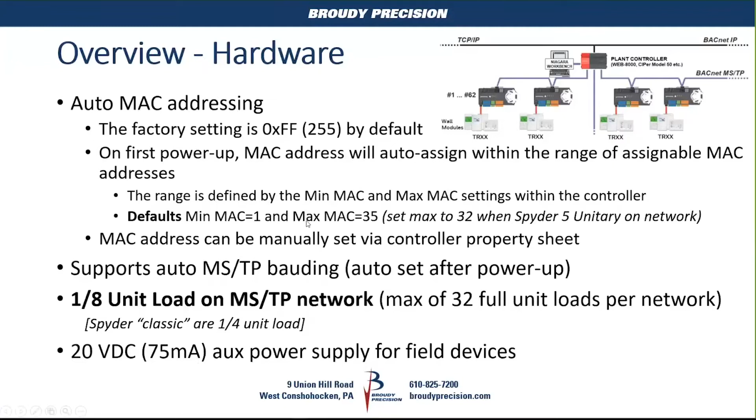Also, just like the Spyder, you have a 20 volt DC, 75 milliamp output on the controller, so you can power up field devices with that voltage. It might be a humidity sensor or something like that that you're powering up, or a velocity pressure transmitter or something.

The diagram here is showing the internal wiring of a controller. This is something that we usually don't even find on Honeywell literature. On the FAQ manuals by Guy Zebrick, he has these all laid out that way, so I thought it was worth putting that on here.

So as you can see on the solid state relay outputs, there's 3 of them, and there's an in 1 through 3. So you have to source the voltage for these. So you actually have to go back to terminal 1, your 24 volts AC, and power to this input terminal here to source the voltage for the solid state relays.

Just like the Spyders, since it's a 2-wire BACnet bus, you have to use earth ground as that reference. So you have to make sure that you earth ground the 24 volt common terminal. There is no earth ground terminal on this controller, so you have to do it either at the transformer or at each controller on terminal 2 to earth ground.

The shield terminal is just a dummy terminal. It's a convenience terminal. It doesn't go anywhere internally to the controller. You'll see your 24 volt common input is common to the grounds on your I/O. As I mentioned, you have to source the 24 volts to your solid state relays.

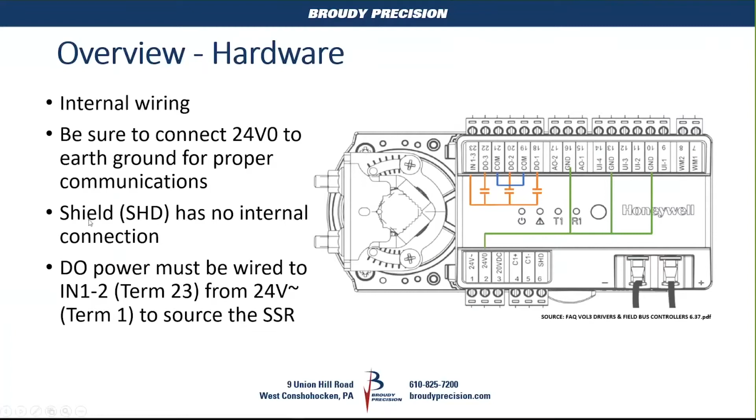And if we look at some of the software pieces to it, the controller is a BACnet Advanced Application Controller. While it's in progress, they've submitted it. I guess that takes a long time with the BACnet testing labs to approve that, but that is the intent of this controller, to be approved for advanced application.

In programming, it supports online and offline. So online, it's live, so every change you make automatically gets downloaded to that controller. So if you're working live, then it's sort of like an all the time debug mode where you see live values in your application.

Another neat feature, I think this is going to be a real helpful one, it's called application cloning. It allows you to set up a group of controllers where you can clone the application from a master controller, and then you designate target controllers, so you can do a master sync, which will then take that application and push it to the other controllers.

And obviously VAVs is a really good example of doing that, where your cooling only boxes are all going to be identical, except for your flow set points, your K factor, those type of things. So they give you the ability in there to allow syncing or not syncing of your parameters.

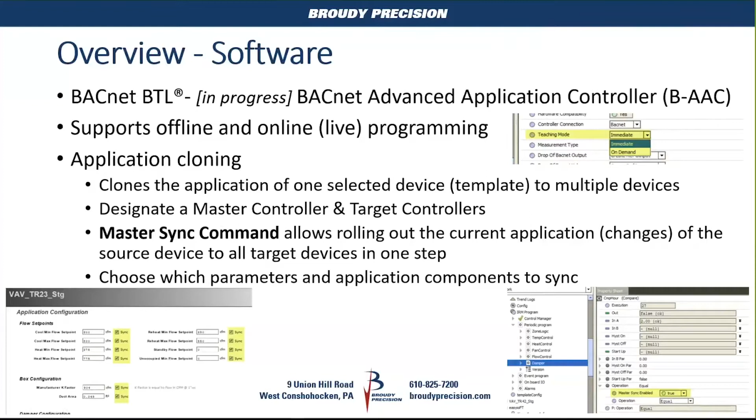Canned applications, they've got a handful written right now. John Hutchey has templates written for VAV with TR23s and VAVs with TR42s. Then he has a staged and he has an analog for your heat as your choices. So basically 4 templates are created. In those templates you have a standard graphic. This would be the status page here. This would be the set points PX here.

And then over on the right side you can see where there's an application config view, where you can go in there, very similar to the config wizard views that you had with the Spyders. You have your zone, config, temperature control, flow control, IO configurations. So you have easy to use screens to set up your application.

And then also, as we had with Spyders, you have a flow balancing view, which is set up basically the same way that we would do the Spyder VAV balancing, where you could do your K-factor balancing, or you could do your 2-point balancing. And then you have your 0 balancing as well. So we have the ability to do all of those things.

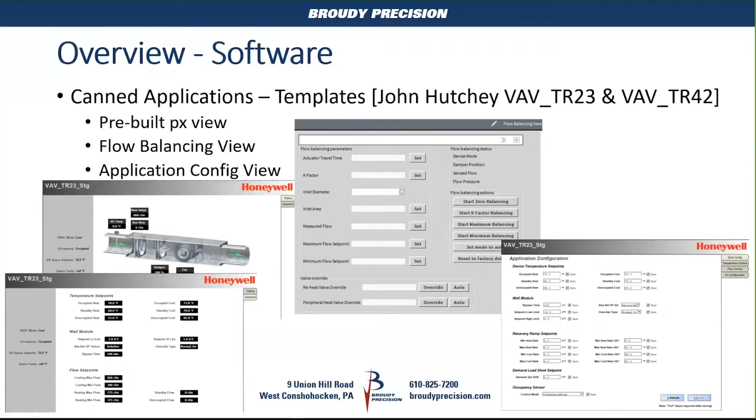As I mentioned, we have a Spyder Classic or Spyder to Spyder 5 migration utility, which again is exactly the same way that it was done with the CIPer Model 30 Spyder migration tool. It's underneath Tools. It's called Spyder To Irm Nx Migrator. When you open that up, you have the ability to choose station, library, exported library, or custom palette. So you can go through and migrate those over and use them in the Spyder Model 5 VAV controllers.

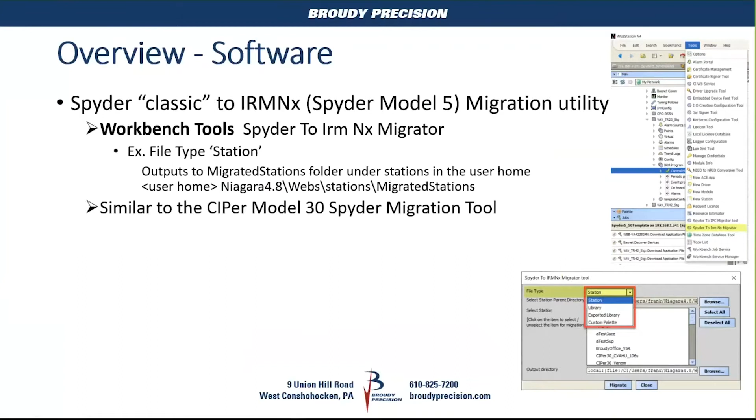A little comparison of the Spyders. What I've listed here are, the first line is the Compact VAV. Then the next 2 are the 2 models of the Spyder Model 5 unitary controllers. And then the closest Spyder Classic controller that fits what the Compact VAV fits, and that's the PVB or PVL 4022 AS. And then if you look at it, live programming, you can do in everything but the old Spyders.

Application cloning, only in the Spyder 5s. This is a big difference here. The old PVL, PVB controllers only had 372 kilobytes of memory. There's 4 meg of memory space in the new controllers. You have the integrated actuator with the Spyder Model 5 Compact VAV like you did the Spyder.

The IO mix is for the Compact VAV versus the Spyder VAV. Both had 4 universal inputs, 2 analog outputs. Only 2 triacs with the Spyder, and we have 3 solid state relays with the Spyder Model 5 Compact VAV. And the new Compact VAV is BACnet MSTP only, where you had the option of choosing a Lon Spyder or a BACnet Spyder for VAV.

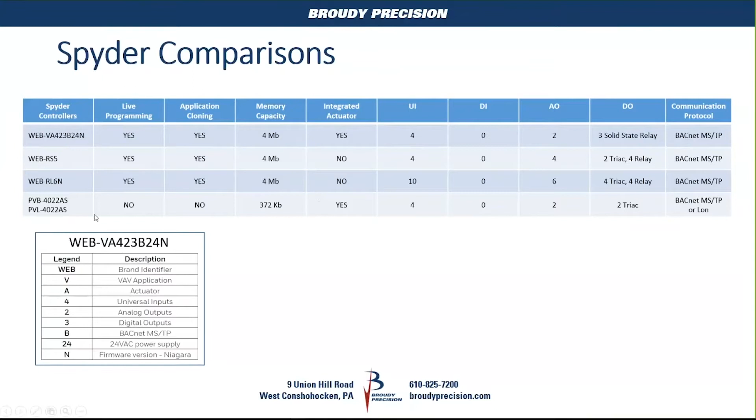If you want, I can stop here for a second and open it up for questions before we move on, rather than wait till the end. I figure with this slide, maybe there would be some questions. So if you want to unmute yourself, please do that. Now's your chance.

Okay, I either put everybody to sleep or there's no questions yet. That's fine. Either way.

And you have the diagnostics. They've added a couple more LEDs than what we had on the Spyders. Obviously, you have your power LED. There's a status LED, and then there's a BACnet transmit and a BACnet receive LED. And then based on the various possibilities of the blinking, you'll see over here that gives you a little more information than what we had with the Spyder.

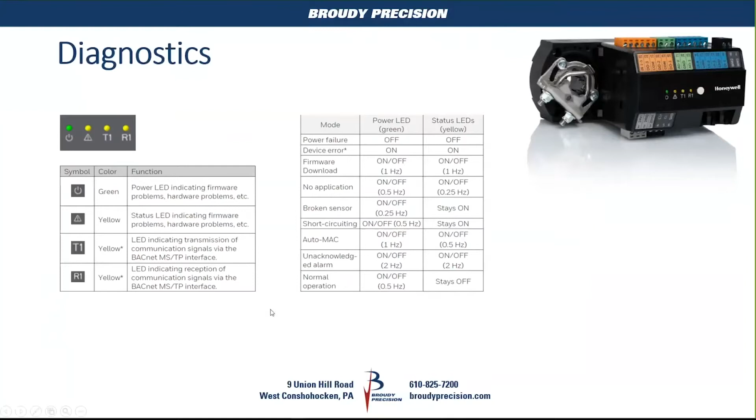And if we move, the next thing would be I'm doing a brief overview of the IRM programming components, and this was the same as what we have with the standard Spyder 5. Which, as I mentioned, was a Tech Tuesday back in October. So I just pulled a couple of these slides over just to go through that.

When you have an application expanded or a controller expanded, what you're going to find in there is the control manager. Then you'll see there's a periodic program, there's an event program, onboard I/O, and alarms. Basically, the control manager manages all the functions and displays the status of the application on the controller.

Periodic program, and this will be the folder that 99% of your applications will run. It is a deterministic control engine, so it's going to execute every 500 milliseconds, so every half a second it'll execute, guaranteed every half second. And it's going to run in a specific manner based on the order number of each of the components that are in the application. So your application would run in here.

If you have an application where you need something to run quickly right away, you could do that under the event program. It executes every 1 second, which you're wondering, okay, why would this be for fast applications? Well, under normal operation, it's every second. You set it up that if you have a binary input and you connect to a component within the event program, it'll run as soon as it sees a change on that binary input. So as soon as it sees it within a split second, it's going to be a lot less than 500 milliseconds. It'll then cause that application to run at that point, and then it'll go back to once a second.

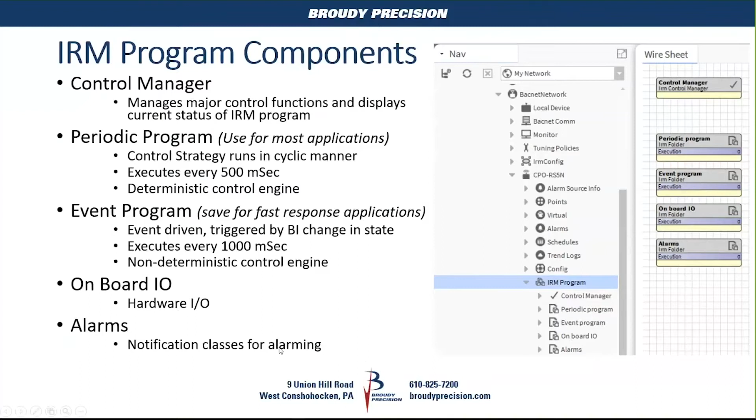As I mentioned, this is a controller that you can program live. Basically, you have two different engineering modes. You can do everything offline, and then go online to commission and download your controllers. It's done within Niagara, and then online, as you go, it'll download each change as you make it. So it's basically instantaneous downloads of every little piece. So it's constantly in sync, up to date in the controller with what you have in your database.

The application running in your station, you have what's called the project, and that's actually the controller database, and it's located in the station. And then you also have the controller. Obviously, the application lives in the controller. So you'll find where you can go in and you can clear out the project, you can clear out the controller, you can upload, or in this case here, it's teaching and learning. It's a different terminology than we're used to seeing, but teaching to controller downloads the application to the controller from the project that's in the station.

And as you're making changes, you'll see little yellow triangles with the exclamation point. That signifies that, hey, a change has been made, but it hasn't been pushed to or taught to or downloaded to the controller. So that signifies when you need to do a download.

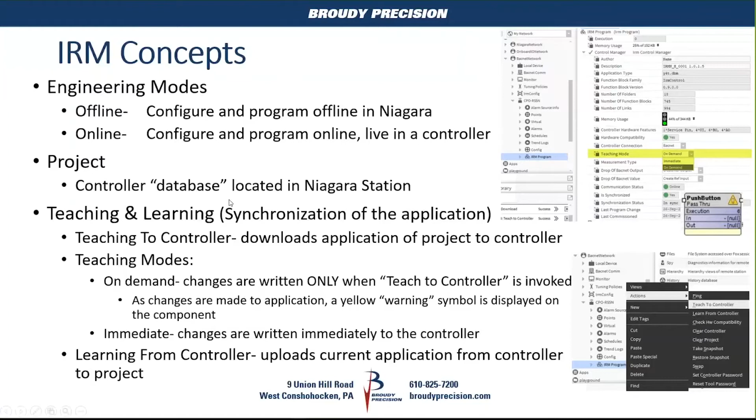As I mentioned, a few other things here. You have clear controller, so it deletes the application from the controller. Maybe something you want to do before you download a new application to it, just tell it clear controller, wipes it out. Then you can do a teach, and it'll take the application from your project in the station into that controller. Clear project would be where you want to clear the application space in your station for that particular controller. There's a check hardware compatibility, and it verifies that the configuration you have defined for that controller will work within that physical controller.

And they have another piece in here called snapshots, where the current status of an application can be backed up and restored later. Take snapshot really means backing up the application. Restore snapshot means restoring an application to the project. So if you want to back up the application that you can reuse in different stations, you can take that and then restore it back.

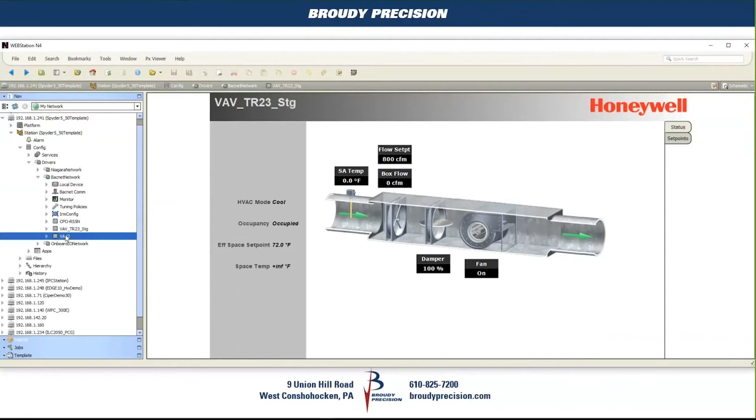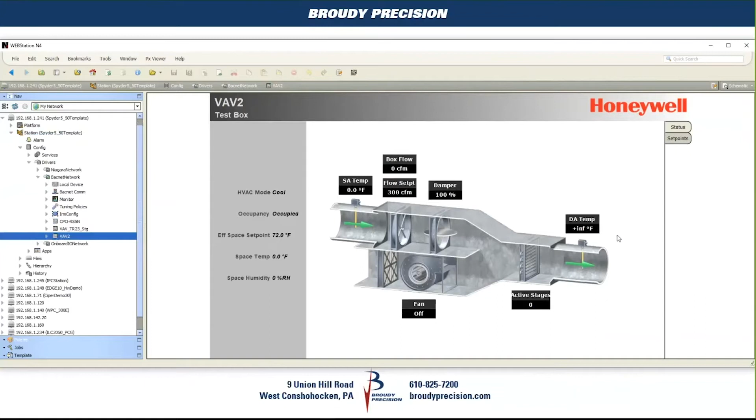Right now, I'm running this on a CIPer 50 controller, which is where the station resides. In there I've got a Spyder Model 5, the unitary one, and 2 VAV controllers as well. If you click on the controller directly, it automatically brings up the PX standard view for its graphics. You have its status page and your set points page.

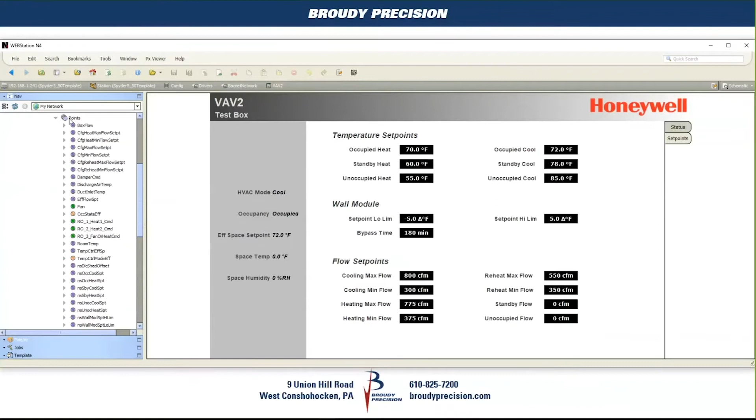If we expand that, you have your points folder, and again, these are all the BACnet points you're bringing in from your application. And you have your IRM program, and the control manager I mentioned is where the status is for your controller. It tells you the IO counts, the teaching mode I mentioned with on-demand and immediate, and the drop of BACnet output value.

The one area I haven't had a chance to play with is the peer-to-peer functionality. From what I've read, it doesn't do standard peer-to-peer; it does a reference in, reference out type of thing. So I can't explain or show that today, but we'll be doing subsequent training videos as this moves along.

Communication status tells you if it's online or not. Is it synchronized, meaning, does the application in the controller match the application in the project in your station? What the baud rate is. For whatever reason I had my baud rate set at 19.2, but 38.4 is the typical default baud rate you'd want to use. What's the deal with Modbus?

Remember, this is used for the unitary and the VAV controllers. The Spyder Model 5 unitary controller has a second RS-485 port for Modbus, where you could bring in a VFD or maybe do some I/O if you wanted to. The unitary controller gives you the ability to bring in Modbus devices, but the VAV controller doesn't have that. I don't think it's necessary for the VAV.

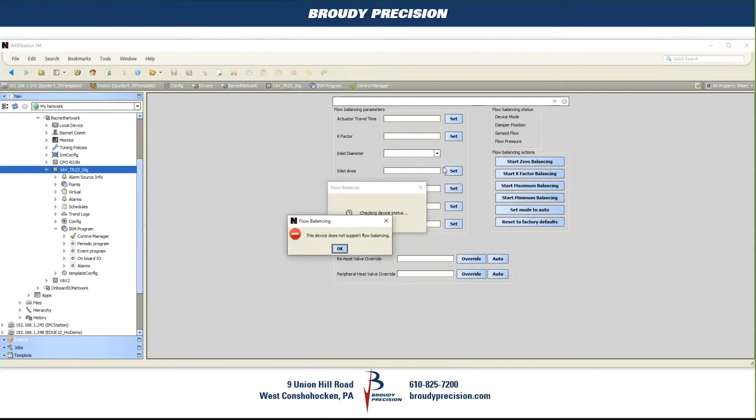But as you can see here, if I do go there, it still doesn't let me do it. So I have a bug reported for this. So I figure I'm going to show it because, like I said, they haven't released it yet. So I don't know if this is part of why they haven't released it yet or not. But as you can see, to get to your balancing, it's on the controller itself, and you have the full balancing feature available when it works. And that at this point is not working. So we'll leave that go for now.

On the control manager, as I said, you got all your statuses. You're going to set up if you're going to do immediate teaching or you're going to do on demand. And the only reason I could think of doing on demand would be if you're trying to change an application and it's a critical control and you don't want to disrupt control with intermediate downloads. So you want to completely change your application or do whatever it is offline and then force it at one time. That's the only reason I can think of to do it on demand, but you get to choose which one you want to do.

Frank, when these controllers are being downloaded, do you have a cycle of the outputs? I mean, what is the behavior of the controller? It's whatever the application would. It depends on what you're making a change to. You're not downloading the whole controller. You're only downloading a single piece of it. I see. So if you broke a link to something and there's a chance that it's going to go from true to false or something like that, then yeah, it potentially could do that. I see. Thank you. But it's a VAV application, and yeah, I guess if you have stage reheat, it could be an issue. But I don't expect that you're going to find that to happen.

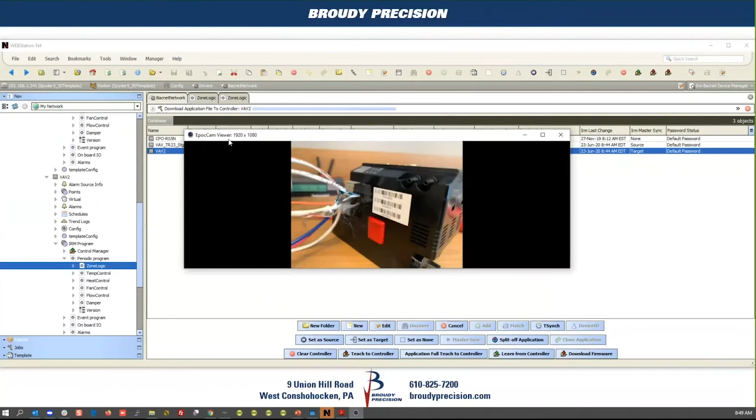On the side of the controller itself is the serial number there. Yeah, you can see what the controller looks like there on my very neat and very nicely wired test bench.

Are these available to purchase right now, or are these still? Well, based on that email that came out from Honeywell last week, they sure make it seem like they're available for purchase. Just the software is not available, so it's kind of tough to work with. I guess the thing would be if you have a project that you want to use these on, you don't need the programming right away. Now I don't know if I've seen those announcements before, but never actually have them available to ship yet.

But it's something we need to find out so that we can look to start stocking them, because obviously we want to be able to stock them, and especially knowing that it's firmware that's downloaded through Niagara, we're not too worried about if they come out with new releases, because the hardware is solid. The hardware there's no issues with. So having stock of them shouldn't be a problem. It's just getting the latest firmware when it releases, and obviously we'll make sure we have that available to everybody through our BP Tech Center.

How's that going to be deployed? Sorry? Well, I know it's through the JACE. I'm saying, like, if you're running version whatever, is that just basically a new updated IRM module that you have to copy in? Or I'm just not sure how the firmware gets into Niagara. Like, what are you copying and pasting?

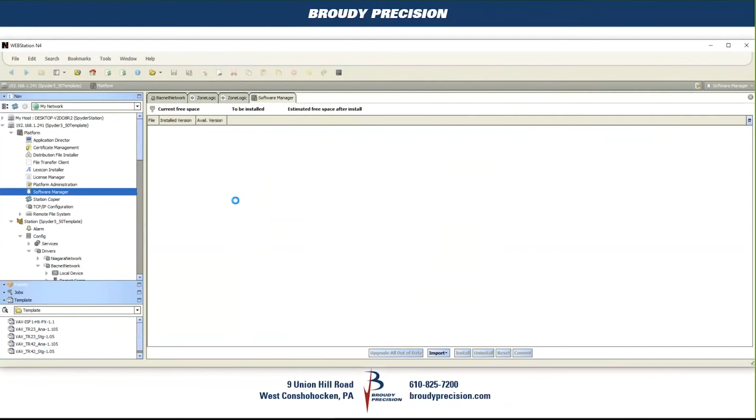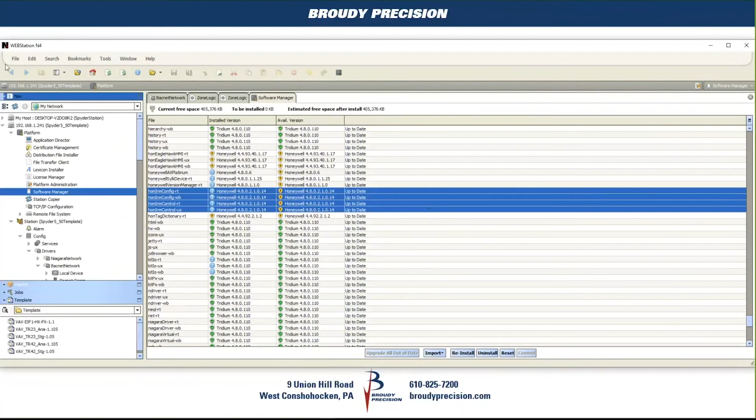But if we just quickly go in and see what we have here, it's going to be primarily in this grouping here. I thought it'd be Honeywell IRM. There you are. IRM. Oh, I'm still in the wrong section. Down here. Yeah, the IRM modules here. Plus, there's a couple of modules that are used, I believe. I thought it was a Spyder module I saw get updated as well. But basically, part of the release is going to be the modules you're going to need, the templates plus the firmware. Okay.

So again, now we're all linked up, and actually I noticed something here that I want to mention. You'll notice here something different that you wouldn't have seen in a Spyder. Normally you have your network set point, this module here. You'll notice that there's a save permanent module. That's something new. The way this control engine works, it requires this in order to be able to write back to this wall module, to this set point. It's an extra component that's used in the application. So if you were to migrate one of your Spyder applications, you're going to see a lot of these added as well. It's just an extra piece that you got to be aware of.

And I mentioned the way you could have it break out of the sync. And if we look here, there's your master sync enable. So if I wanted this network set point to be unique for this controller and not be part of my sync group, I would come in here and make it false.

So now I made this change. We come back here. Let's see if I can get it to redeem myself. It still didn't show up that way. Let's go back here. It's still showing like that. So let's see, at least if I can make this work. See, now that it's not general released, I can still say, well, it's in beta.

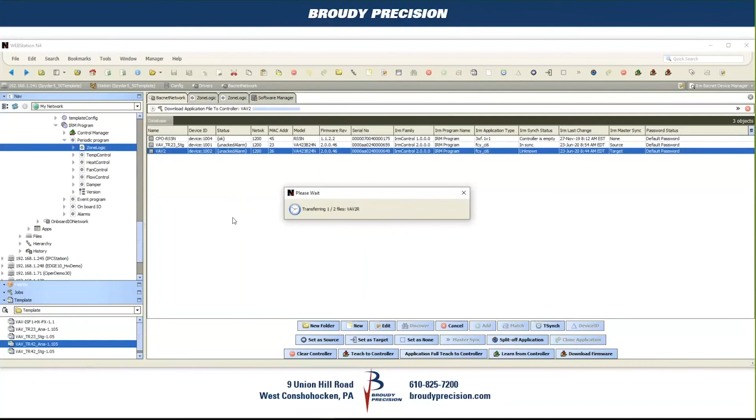Or it doesn't like me doing it while I'm doing a download, so I'm taxing it now. I'm not an impatient person or anything. It's another task in the queue.

Now it comes up with that configuration property. So as you add these controllers, then you can say, okay, my duct area is this. Here's my K factor. These are my flow set points. And boom, done. So now I have that controller in the network, or in my project in the station. So you could from here do a discover, match, and have it ready to go after you do a teach.

And I already know I can't take this and enable it. I've already added and deleted enough controllers. I didn't restart my Spyder 50, so I've exceeded my global capacity. So that's my excuse, and I'm sticking with it. But you can see doing a full download or a full application teach takes a bit of time. But realistically, I don't think it should need a full teach when you're doing a partial. Our partial was just, I guess I don't have it open still, but we'll let it go through.

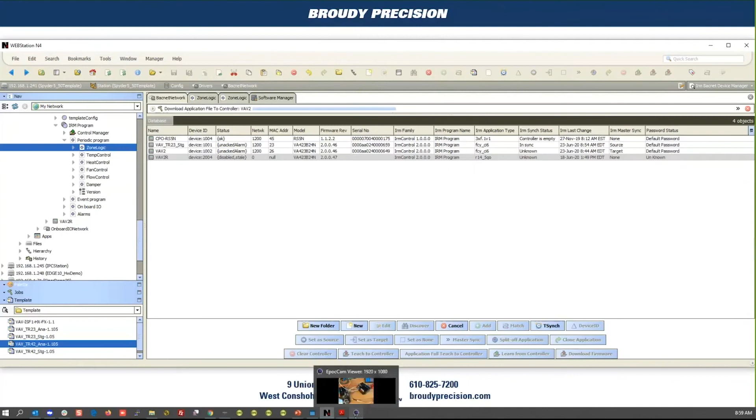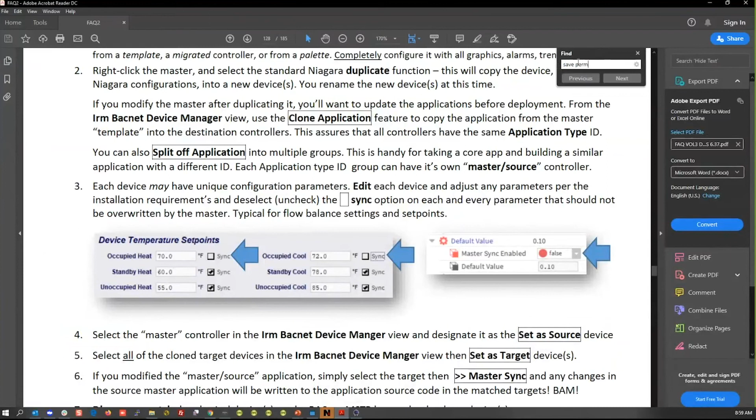What other questions? There's got to be more questions. Can you hear me, Frank? On the save permanent, I read that it's 10,000 write cycles. Is that for the whole controller for the save points? That I do not know. Let me think. Do I have it open? Let's see. What was it called? Save points, right? Save permanent. I'm sorry. Thank you. Yeah, save points is stupid. I don't think it'll ever hit the 10,000 with set points, but yeah, all the same, it's just one I was curious.

All right. It says the block is smart and won't burn to the 10,000 write max chip unless the data changes. So it's only when you're actually making a set point change. So I can't imagine somebody's going to make 10,000 changes in the lifetime of the controller, since it is a set point. Yeah. And it knows to not write if the value hasn't changed.

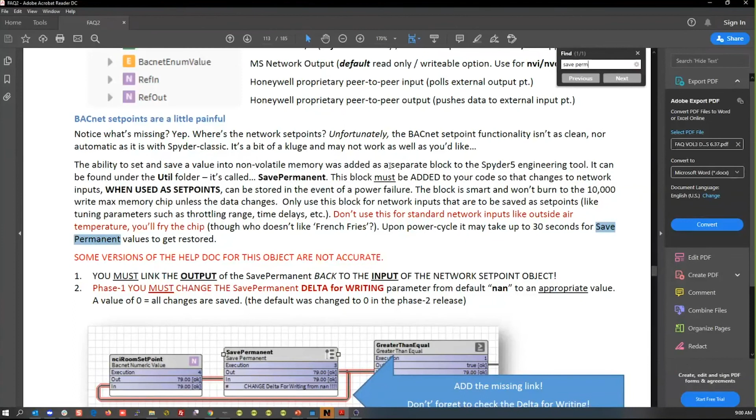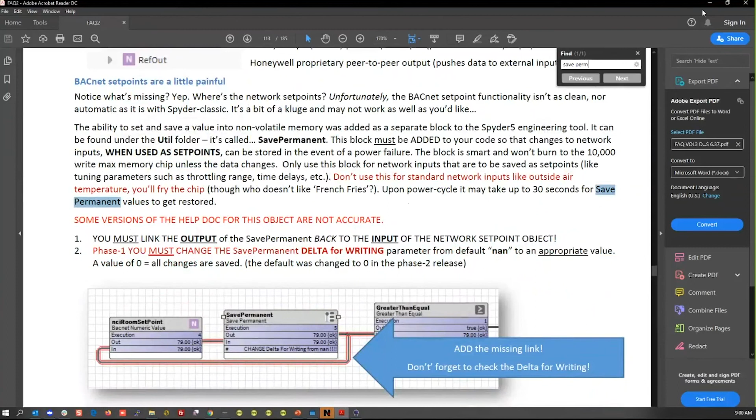Okay, so that's done. So now we go back into that controller, second controller. We should be able to see that the change was made, and son of a bitch, it didn't get made. Okay, well.

The only thing I can think of is it doesn't tag that, because I really didn't change anything other than positioning. So maybe the positioning doesn't warrant a change. I don't know. That doesn't make sense to me, but it's in beta. And like I said, we'll be doing training videos and things as we go along for different aspects of this. And obviously cloning will be a big part of that.

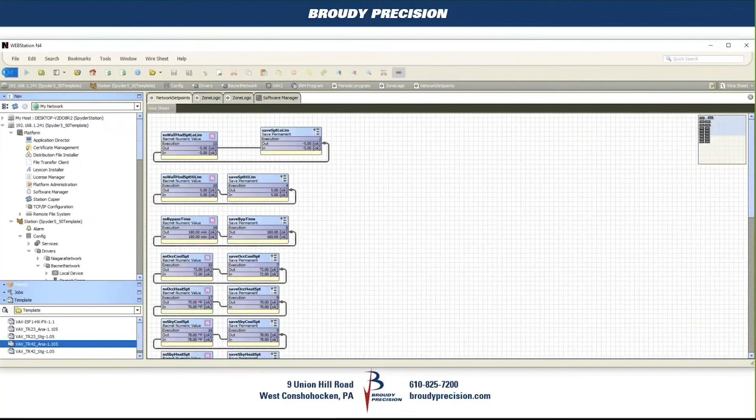So we could check that off as a big fail for me. Thank you. But I like to fly without a net anyway.

So let's see, what else? Looking at my list of things that I wanted to touch on, I believe I got everything. I mean, the only other thing I really didn't do, but I've done it in the past with the other Tech Tuesday or with the CIPer 30 Tech Tuesday, was that tool. Now, where did it go? Oh, it's over on my other screen.

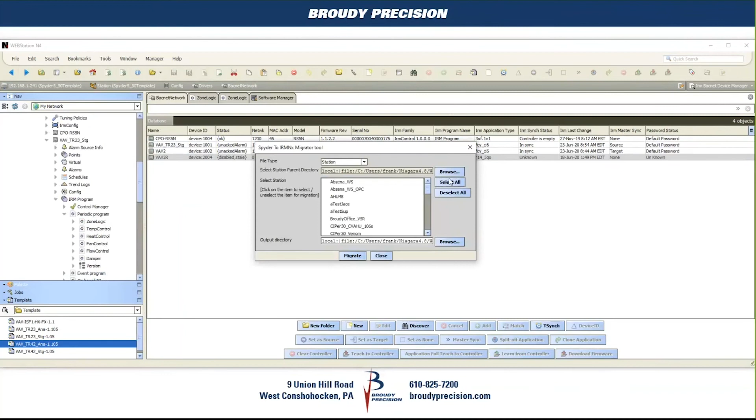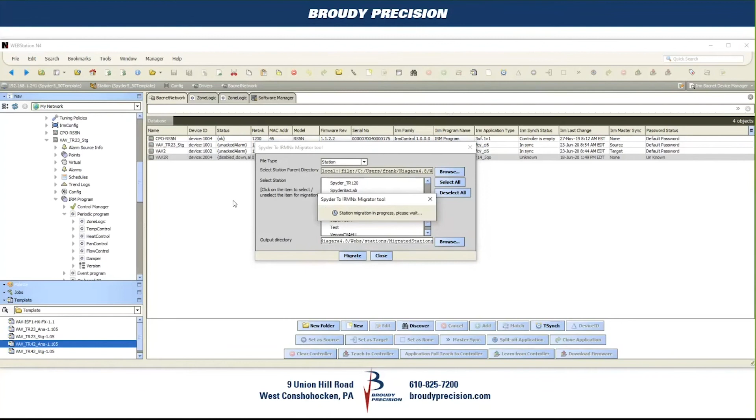The output directory is going to be under your user home, under the stations folder in a migrated stations folder. And you can put it wherever else you want to put it. That's the default. So I'm going to say, okay, sure, let's go ahead and migrate that. Migrated successfully, and there is a report txt file.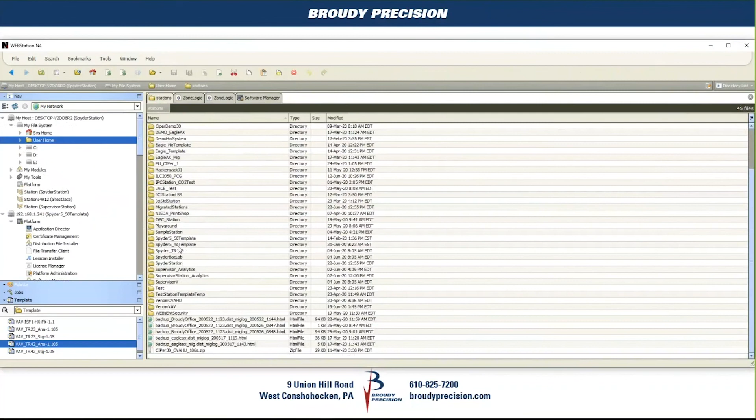So now if we go up here to my user home, stations, and then we go look for migrated stations, we'll see in there's my Spyder station. There's your report. So you can look at your report. Well, that's coming up. Stations, migrated stations. So here it's telling you exactly what's going on with that.

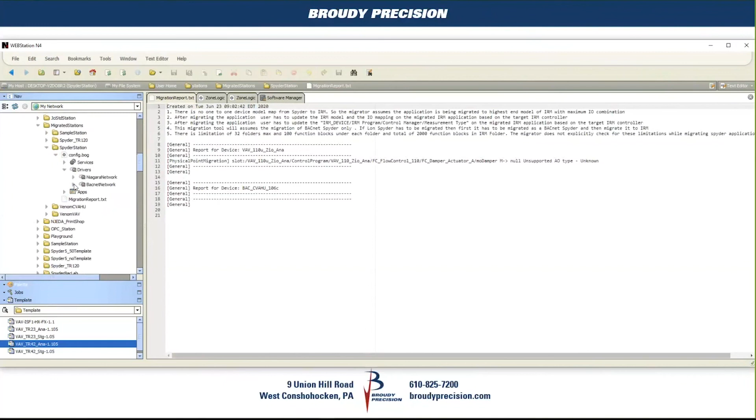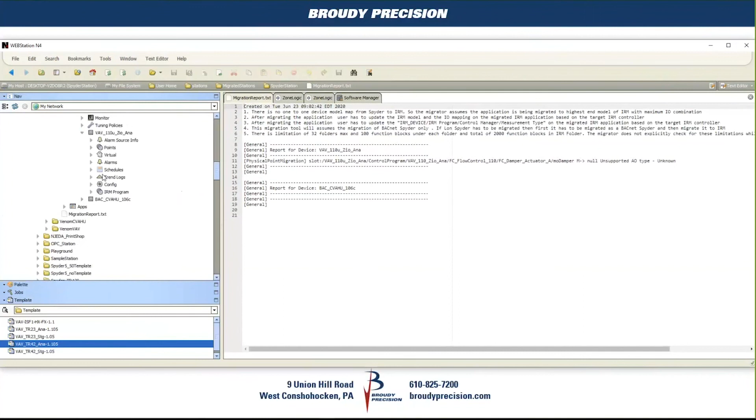And if we actually look at the BAC file, and we're doing it offline, we can go in. Okay, I had a CVAHU and a VAV Spyder application in there. So now if we look at that application, you're going to see there's an IRM program, and then this looks very similar to what we had in our Spyder. So these are actually Venom applications.

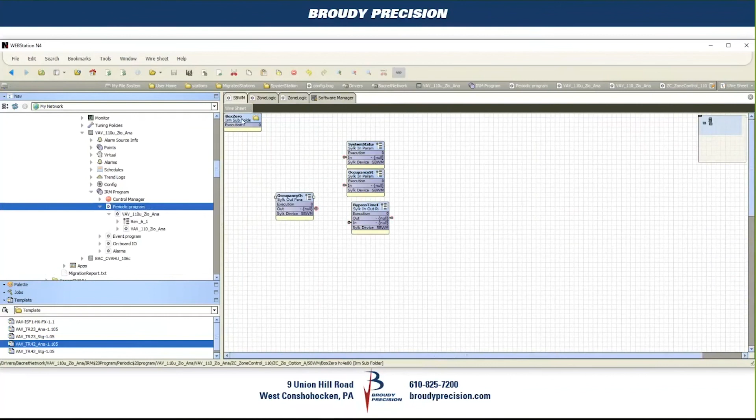So we can go in here and actually see what's going on. It's not that pretty with where it puts things, but at least you see you've got everything. You can go through and everything exists in there and it's usable.

Well, that does bring up one thing. If we go find a, I think this will work. No, it doesn't have it there. I've shown another little adder, which was actually quite nice. AX property sheet. Oh, there it is. On any of these blocks, one of the things that we don't have in here is any kind of place to put notes yet.

But what you can do is right click on any of the components, go to annotation, and you can say here, this is for whatever. And it actually has a slot so you can add a note to each of these components if you want. Nice little added piece in there to be able to document your application as you're moving along. But so there you can see it automatically will convert a Spyder application over to the Compact VAV format.

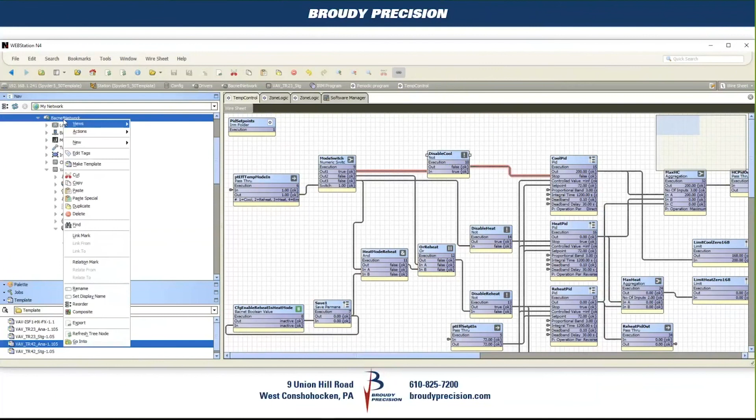I think that's part of the little delay you'll see there with the hourglass, a little circle, is that it's sending it to the controller as it's changing on the screen. So what do you think? No more comments? Questions? I think it was pretty cool the way that you were able to do the cloning of a VAV application and then just bring up the variables that need to be changed. It makes it very quick if you're doing a lot of them. Right.

Yeah, and especially with the template allowing you to do there, but then having the ability to go in here and choosing, if we go back up here to the, let's see, was it here? No, it was down on. I lost what I was.

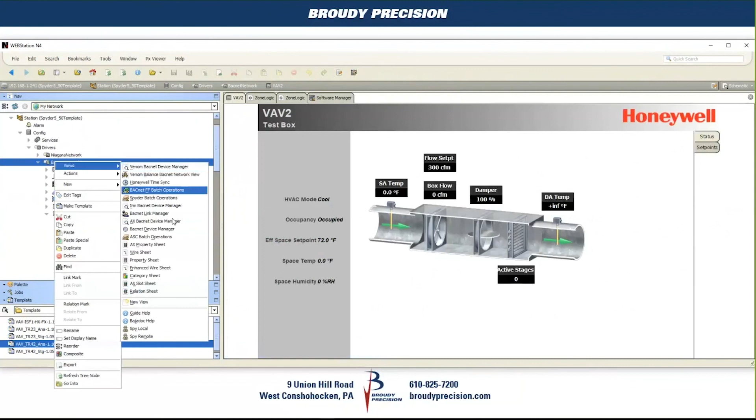I think Mike brought up a valid concern, though. If you're having a crew roll across the floor and sticking in 30 of these things, it might get a little hairy trying to figure out which box is which. Right. You're going to have to be careful about that. Mm-hmm. Yeah, definitely need to watch what you're doing.

That's going to be something we're going to need to do more playing around with to get a real good, solid procedure for doing that, to make it as simple and not have any issues doing it. It's all about saving time, so you want to make sure you don't make up for that and burn time by doing some of these other things that could cause an issue. Right, exactly.

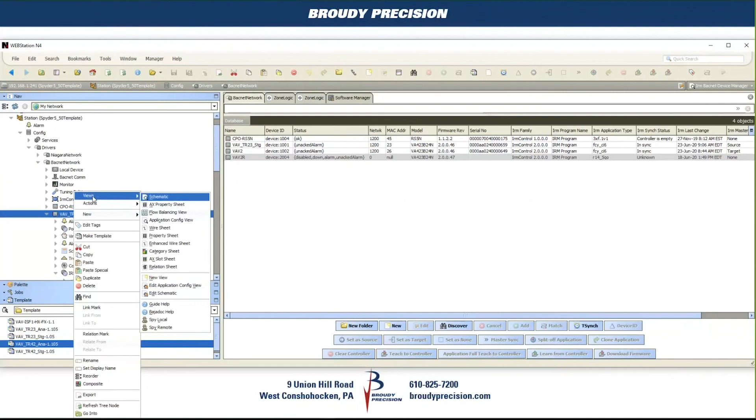So Honeywell has the Ethernet off the CIPer 30, and they also have a twisted pair offering here, which is extremely competitive price-wise. Yeah, absolutely. So if you go back and you look at that last one here, it is priced well. Yeah, still a lot of jobs out there where twisted pair is the right price to be competitive against other contractors. Yes. And this is, I think, making us more competitive for those applications. Right.

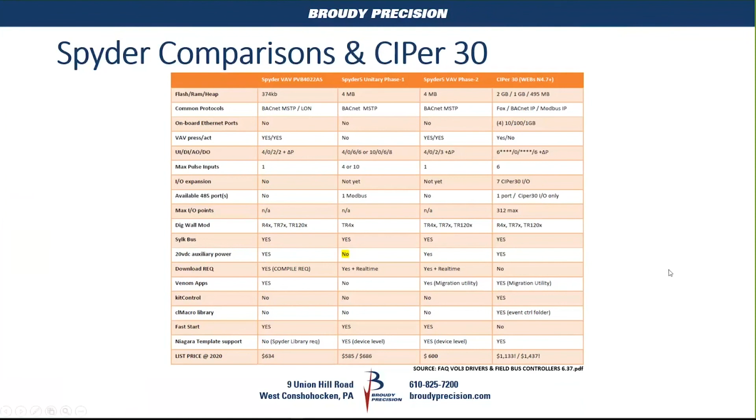And then with BP Tech Center, Matthew, we have the ability in BP Tech Center to do, was it favorites in there? And then if there's something changed or added, you'll be notified. Is that how that works? There's no notifications yet, but you can follow specific products, basically. Just star anything that you want to follow, and then on the homepage of BP Tech Center, you get a list of just those specific items. And then there's a feed page as well that gives you that.

Okay, thank you. And usually if it's a major change or something needs to get out to people, I'll send out a notification anyway to my email group of all the webs guys, and make sure everybody's aware of it. And that was the other reason I set this last line up here, that you have to actually log in to BP Tech Center to get it. One of the agreements I have with Guy Zebrick is we're able to publish them on BP Tech Center, but we can't have it freely obtainable by anybody. You actually have to be a webs partner to have access to that part of BP Tech Center to pull it. So just to protect all of us.